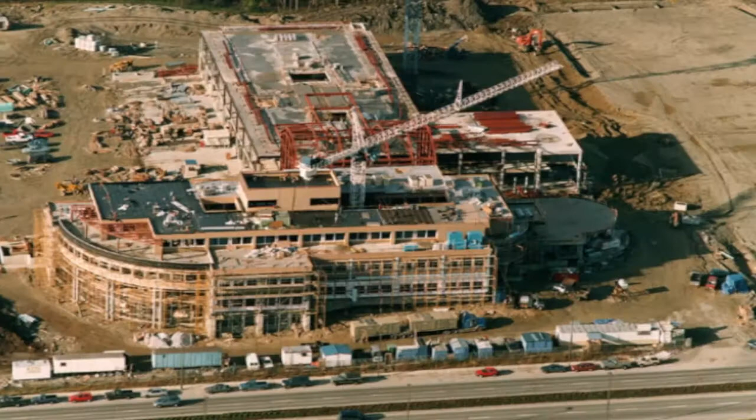DGS Construction has safely and efficiently built many buildings since 1983. The types of buildings DGS has built range from recreation complexes and schools to strip malls, the Justice Institute, and car dealerships.

Sometimes buildings are built from the ground up, and sometimes they are destroyed, then rebuilt.

The hazards on any DGS construction job site are similar to any large construction project. The construction industry has many hazards. However, we expect each person on our job site to plan and minimize injuries and incidents from the hazards.

DGS Construction has a legal obligation to coordinate everyone on our job site to ensure the hazards of one contractor do not affect another contractor. We also have an obligation to ensure WorkSafe BC regulations and the WCB Act are followed by everyone.

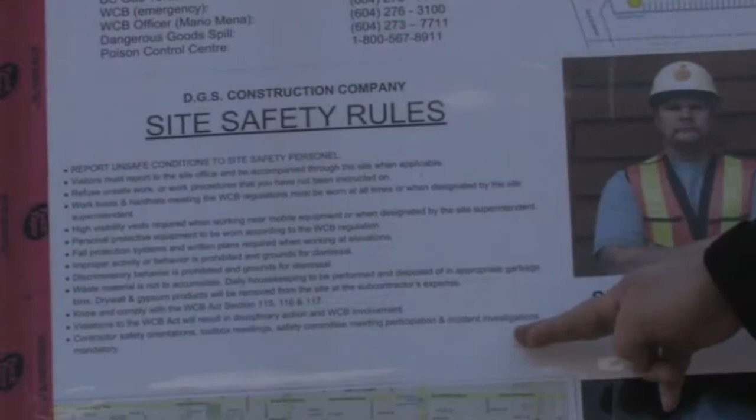Each contractor employer has the ultimate responsibility for developing their own health and safety program and ensuring their workers are following that program. Contractors are also required to follow DGS rules and requirements, despite what an employer has as their own requirements.

WorkSafe BC and the WCB Act and the DGS construction policies and rules must be followed as outlined in the signed contract that was provided at the start of each project. This safety orientation video and guide provided to each contractor will provide everyone with a good understanding of what must be followed when on any DGS construction company job site.

Welcome to a DGS construction job site, and welcome to your construction safety orientation.

In each site office, there are folders containing copies of the DGS Construction Safety Orientation Guide. These are specific to each job site. Each contractor's designated safety coordinator will be given a guide along with the safety orientation sheets.

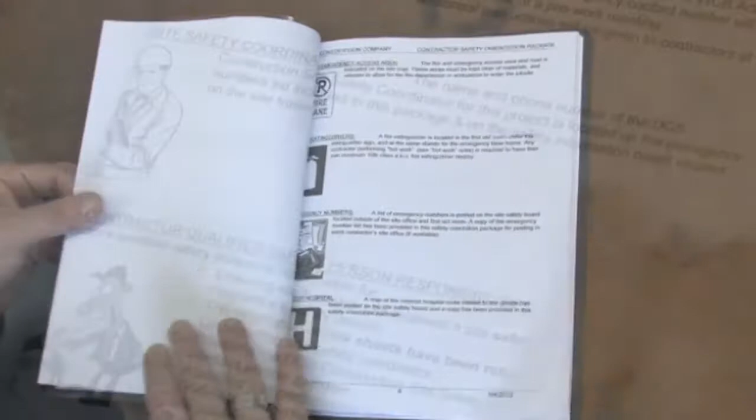The guide is a reference that contains a written copy of all the safety requirements that must be followed as outlined in this video. The orientation sheets are to be completed by each worker on the job site. Check the boxes off on the sheet as they are reviewed with you during the orientation video.

WorkSafe BC regulations require prime contractors to designate a specific person that is responsible for coordinating the activities of contractors on the job site and ensure safety requirements are being followed. DGS Construction designates this responsibility to the site superintendents, as they have the best handle on what is happening on the job site on an hourly basis.

This is the person that you or your company's site safety coordinator should go to if there are any safety issues that need attention.

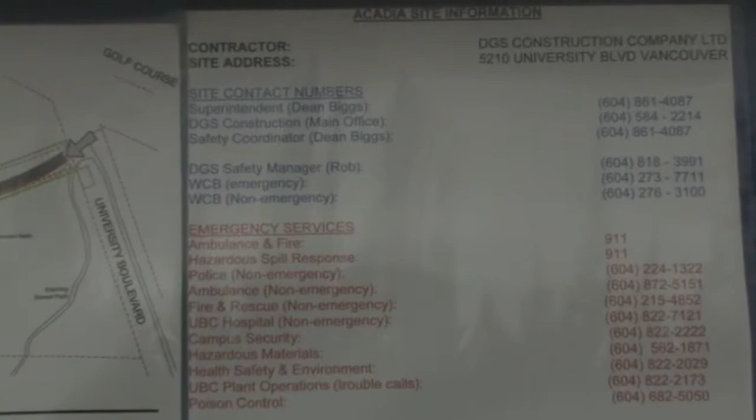The DGS Construction Site Safety Coordinator name and phone number are available from the Emergency Numbers board located on the site trailers and site entrances.

Please enter the DGS Site Safety Coordinator's name on the top left corner of the safety orientation sheet in front of you. Each contractor is required to provide DGS Construction, the prime contractor, with the name and contact information of their site safety coordinator.

The contractor safety coordinator isn't the new guy on the crew. The coordinator has specific responsibilities and will be held accountable for fulfilling these responsibilities.

The contractor safety coordinator is responsible for ensuring each person on their work crew has received a site safety orientation, providing the DGS site safety coordinator with their contact name and number, attending site safety trade meetings, holding toolbox meetings with their crew, reporting unsafe conditions to the DGS site safety coordinator,

informing the DGS site safety coordinator of upcoming work and their associated hazards, so they can be coordinated and planned.

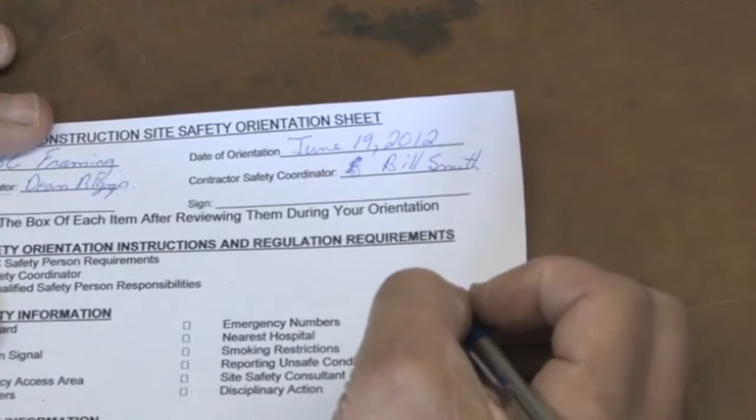The name of each contractor coordinator will be obtained at this orientation and posted on the Office Site Safety Board. This will meet the requirements of the WorkSafe BC Regulation 20.3. Please write the name of your safety coordinator on the orientation sheet, top right-hand corner.

This is the site-specific safety information section of this orientation.

Each DGS construction site has a site safety board located on the site office trailer and at the main entrance gate. Not only does the site safety board contain all the site-specific safety information, but it also includes any safety bulletins that each contractor's safety coordinator needs to review with their crews, so check the board frequently.

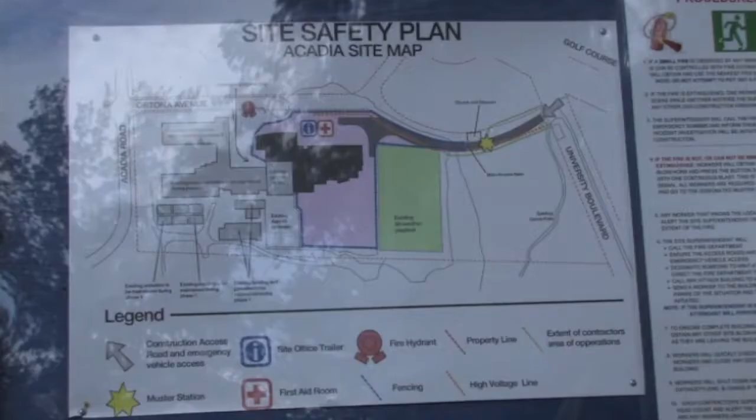On the safety board, you will find a site map which contains any gas and high voltage line locations. It shows where the office, first aid facility, and the location of the muster station, which you must go to if you hear the emergency signal.

Each site muster station location has been chosen and designated based on having a safe place for workers to gather in the event of an emergency. This sign is posted at the muster station. You must meet here if you hear the evacuation signal and wait for your site safety coordinator to do a head count.

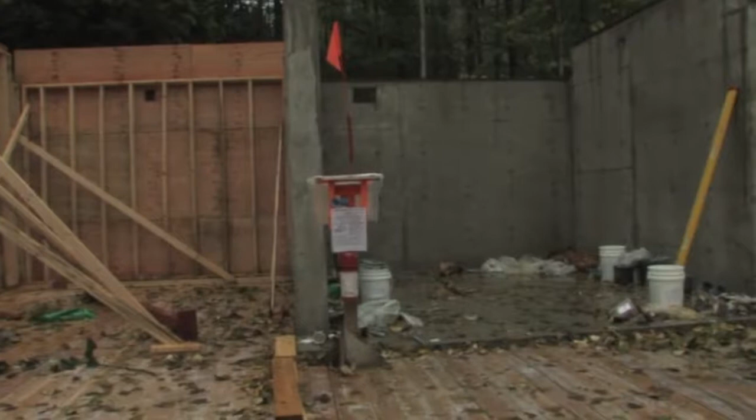In the event of an emergency that requires the site to be evacuated, such as a fire, gas leak, or earthquake, blow the horn by pushing on the top button continuously. Take the horn with you while still sounding it so that other workers will hear the emergency signal.

In the event of emergencies, the fire department or ambulance will need to get into the job site. Ensure you have looked at the map's main access road and that you do not block that area with vehicles or materials at any time.

Fire extinguishers are posted throughout the job site and in the first aid facility trailer. Be aware of where they are.

The Site Safety Board also contains the procedures that must be followed in the event of a fire and outlines when to use the emergency horn to evacuate the job site. These procedures need to be reviewed with all workers during orientations and toolbox meetings. A copy of the procedures has been included in the orientation package.

Contractors that perform work that creates sparks or fire are required to ensure they have fully charged fire extinguishers, and all workers must be familiar with how to pull the pin of an extinguisher and sweep the fire with the extinguishing agent.

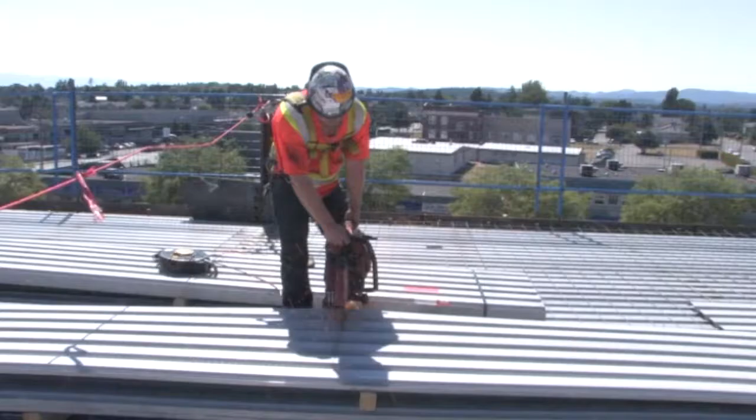DGS has specific fire requirements for contractors that create sparks or use open flames. These requirements include using specific types of flow valve regulators when using compressed gases. Each contractor will be given a copy of the fire prevention requirements.

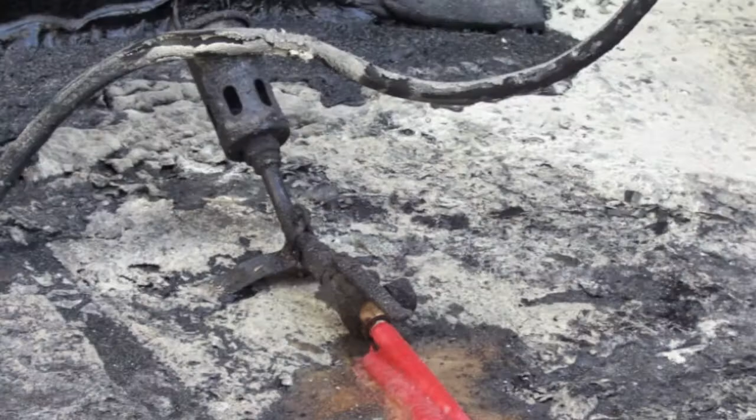Fires have occurred in the past from incorrect torch and regulator use. All regulators used on any DGS construction job site must have an excess flow valve, which engages when the regulator flow button is pressed.

All site safety boards contain the site emergency numbers and the location of the nearest hospital. A copy of the nearest hospital map has been included in the orientation guide that each contractor and safety coordinator has been given.

Smoking is strictly forbidden on any DGS construction job site. Smoking is only permitted outside the gates. There are no exceptions to this rule.

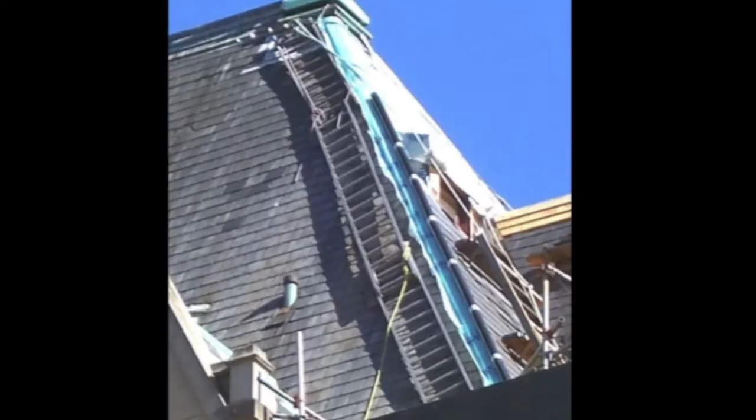Do not create unsafe conditions or put yourself in an unsafe condition. If you see poor guardrails or other unsafe conditions that need attention, bring that information to the DGS Site Safety Coordinator. DGS Construction also has a safety consultant that visits the site and conducts unplanned safety inspections.

Reports are written and many times pictures are taken during the inspections. Copies of inspections are sent to any employer that was not following the requirements of the contract with respect to health and safety. The safety consultant's name is under the emergency numbers list on the site safety board and in the orientation guide.

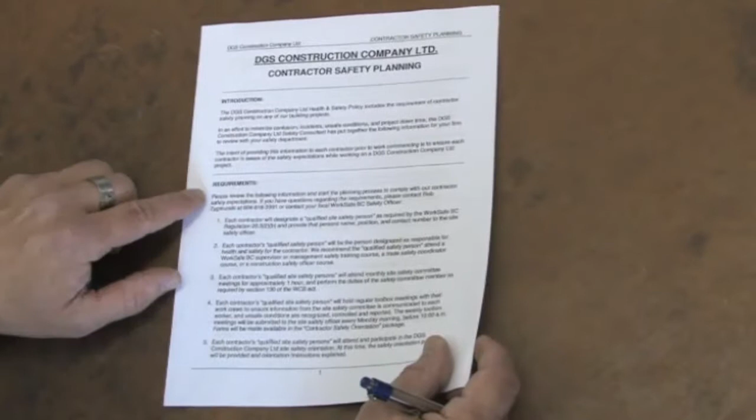As per the written contract, disciplinary action in the form of fines, removal from the site, and WCB involvement are used to ensure all employers follow the DGS construction safety requirements.

This is the first aid and incident information section of this orientation.

During normal working hours, DGS Construction will provide first aid services. The first aid trailer is identified with a sign containing the standard first aid cross symbol.

In the event of an injury, the qualified first aid attendant will provide you with the first aid service they determine is needed until you can see your family doctor. You have the option to accept the first aid services or not.

The site first aid attendant's name, level of first aid qualification, and picture is posted on the site safety board and provided in the orientation guide. You can also report unsafe conditions to this person as they are part of keeping the job site safe for everyone.

If you are not seriously injured and require first aid services, go to the first aid trailer. If the attendant is not in the trailer, you will see the sign regarding using the radios to call for the first aid attendant. Press the call button in the front of the radio to get a hold of the first aid attendant. Use the side button to respond to the attendant to let them know of the situation.

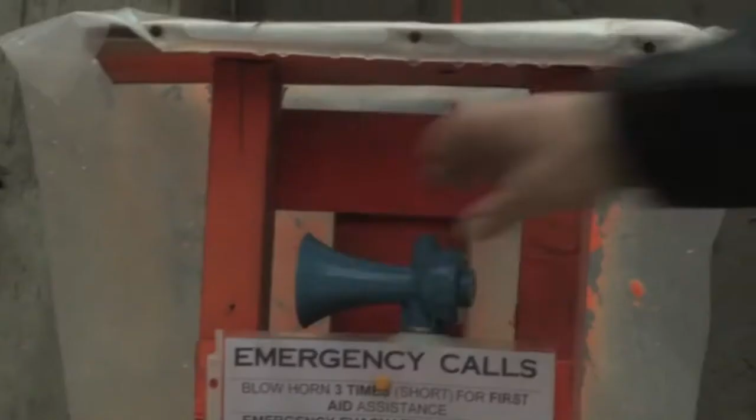If there is a serious injury, the emergency air horn must be blown. The procedure for blowing the horn, 3 short blasts, is posted at the emergency horn station, identified with the bright orange bicycle flag throughout the job site and at the office trailer.

In the event of a first aid emergency, the first aid attendant may ask you to obtain the crash kit and oxygen. These are located in the first aid trailer under the designated signs. If a first aid attendant asks for the kit or oxygen, grab them and bring them to the attendant.

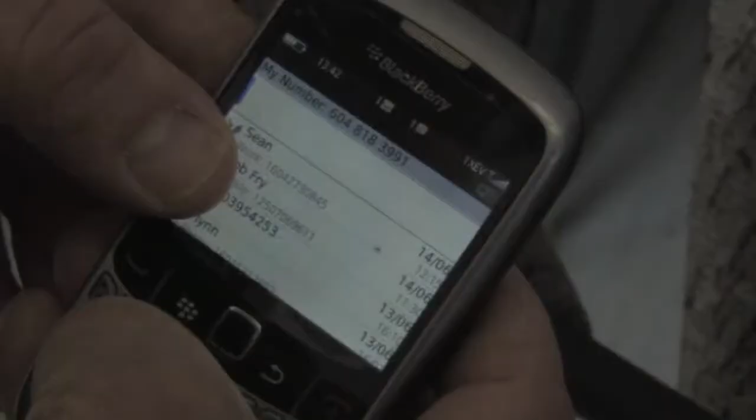If there is a serious injury, or if the first aid attendant asks you to call 911 for an ambulance, use the nearest phone and make sure you give them the correct address, which is located on the emergency horn blast procedures.

To the best of your ability, provide details such as what has happened to the worker and what the extent of the injuries may be. The DGS Site Safety Coordinator or First Aid Attendant will designate you or another person to wait by the site access gate to direct any emergency vehicles into the site and to the incident area.

It is law that WorkSafe BC is called as soon as possible in the event of a serious injury, structural failure, or an incident involving the major release of a hazardous substance. It is the DGS Site Safety Coordinator's discretion when WorkSafe BC must be informed of any incident.

If an incident occurs that requires an investigation, it is unlawful to change the accident scene or remove evidence from the scene. Do not disturb the area of any serious accident. It is the DGS Construction Site Safety Coordinator that determines when the area can be disturbed.

WorkSafe BC requires all accidents that required medical attention to be investigated as per the regulation requirements. This includes all injuries where a worker went to see a doctor.

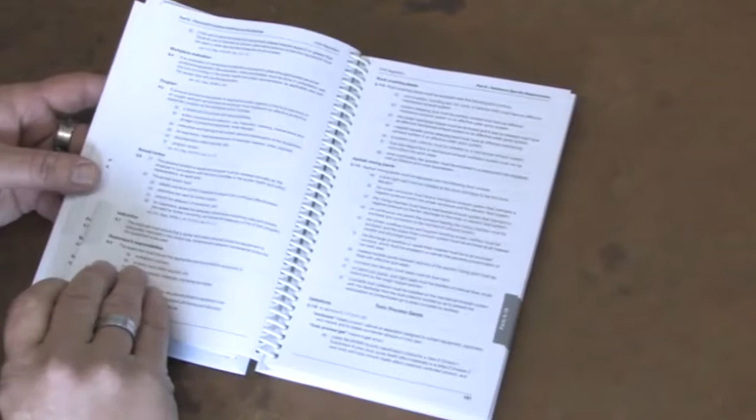Refusal of unsafe work is every worker's right that is enforced by regulations. Workers cannot be punished in any way for reporting unsafe conditions.

I've done it before. I've walked off the site. I'll say, listen, you guys, you can do that. I'm not gonna, and I'm going home. You know what I mean?

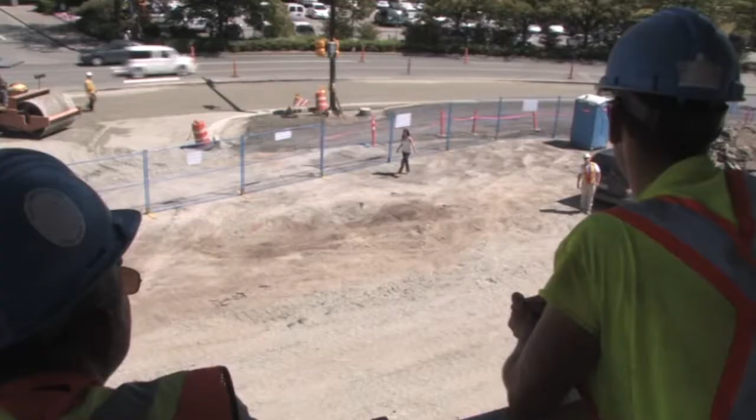Discriminatory or harassing remarks, leering, swearing, unwanted comments, or gestures is prohibited on any DGS construction job site. DGS Construction reserves the right to dismiss anyone from their job site at any time.

Each contractor is responsible for determining when heat stress is an issue, and each employer must ensure fluids are available to workers during hot weather. The site first aid trailer has some water, but that is for emergencies only. Ask the site safety coordinator where potable water can be obtained.

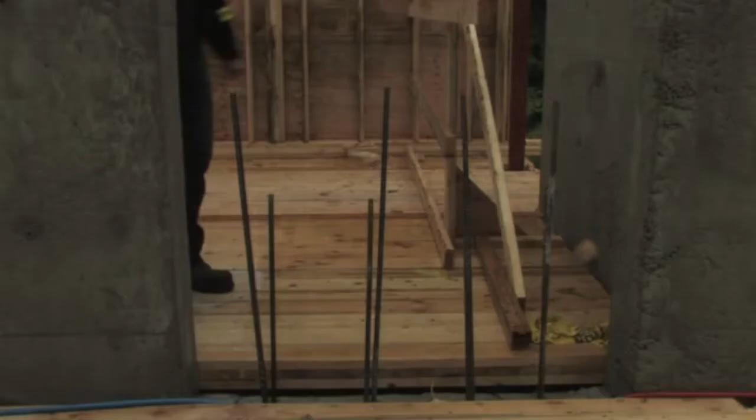Materials that can scrape, puncture, or cut workers, such as rebar, are required to be at least capped with mushroom caps. If workers will be working above an area that contains protruding rebar, the bars must be fitted with lumber. Protrusions, such as conduit coming through a floor slab, must be protected and visually marked by the contractor.

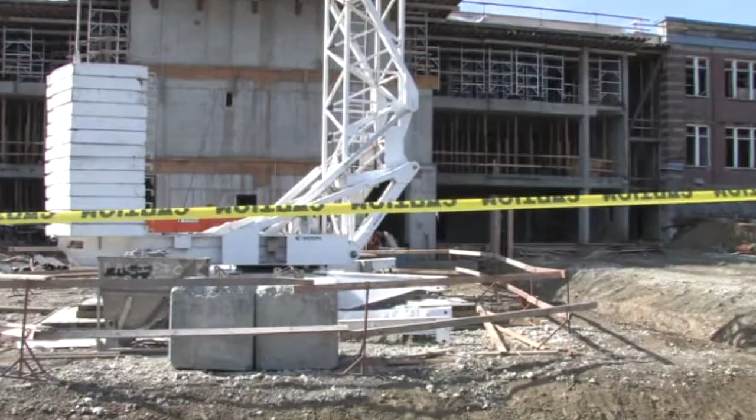Contractors that use cranes or other means to move equipment or materials overhead must ensure no one is below the load. Crane base areas require guarding to prevent workers from entering the swinging turret area. Signs must be posted if working overhead of workers.

Red 'Do Not Enter' tape with signage can be used where workers must not enter due to falling debris or other overhead hazards. On all DGS construction sites, yellow caution tape means you can enter the area after assessing the hazard and checking with workers in the area. Red danger tape means you cannot enter the area at all until the tape is removed. Contractors that use yellow and red tape must remove it when finished and the hazard is eliminated.

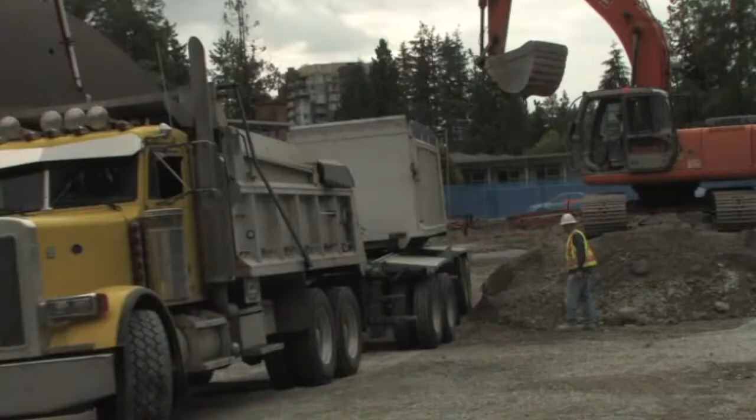Vehicles backing up on site must have alarms and a spotter to help them. Workers that operate heavy equipment must be qualified. Tower crane and mobile crane operators must hold a valid WorkSafe BC operator certification. All-terrain forklift operators must hold a proof of training certificate that meets the CSA standard.

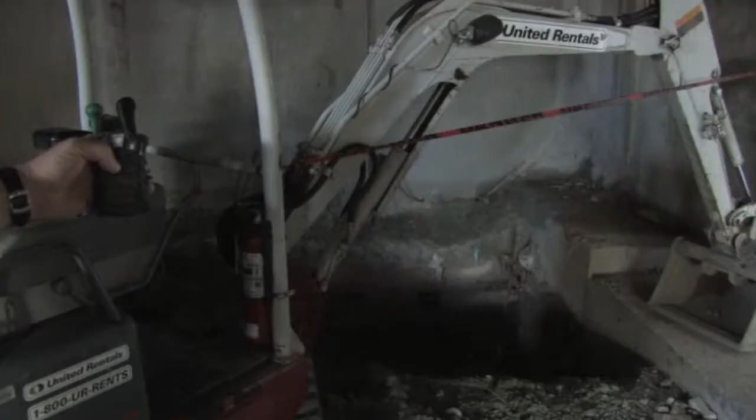If excavators or other internal combustion equipment is used indoors, there must be plenty of clean air ventilation and a gas detector must be used to monitor the air quality. Boom lift operation can only be performed by an operator who has been trained in accordance with the CSA standard for training and holds a certificate proving so.

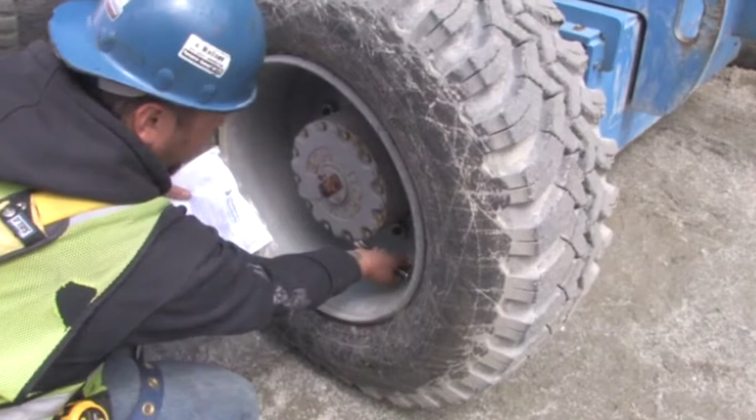All lifts must be inspected for their safe use prior to each shift. The inspection must be documented and kept with the lift. All safety devices must be tested to confirm they are working properly. Prior to using any lift, the work area must be inspected to ensure the lift can be operated safely.

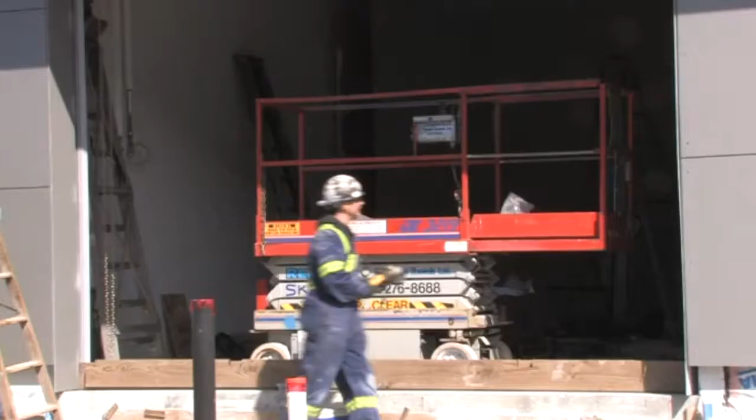Do not add extra decks to lifts to gain more height. Get another lift that'll do the job. Contractors are not permitted to add supporting forks to lifts to hold up glazing or other materials unless the lift manufacturer specifies it's okay and a regulation variance is obtained. Curbs must be installed to prevent lifts from going over edges.

If you need to gain access to an upper roof from a lower roof, don't grab the wall and try hopping up. Also, don't try jumping down from an upper roof to a lower roof - you'll only end up spraining or breaking your ankle. It's not proper access. Neither is using materials that may look like a ladder but aren't built like one - it's actually a pallet.

Don't use other types of skids to try and access the upper roof either. Proper access requires proper planning. You need proper ladders with the proper height to access from one roof level to the next. Correct size ladders must be made available to access decks, floors, and rooftops.

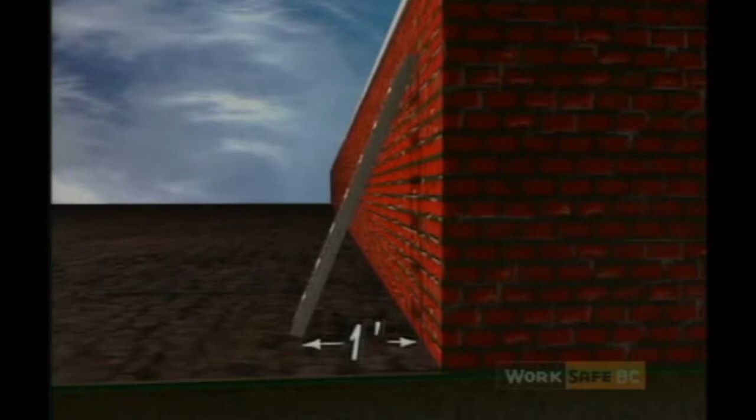Straight or extension ladders must be placed at the proper angle using the 4-to-1 rule. This means the foot of the ladder should extend 1 foot out from the wall for every 4 feet up, and the top of the ladder must extend 3 feet above the structure.

Your extension ladder has to have the right amount of overlap. An extension ladder up to 36 feet needs a 3-foot overlap. A 36 to 48-foot extension ladder needs an overlap of 4 feet. An extension ladder over 48 feet needs a 5-foot overlap. An extension ladder is intended primarily as a means of access, not as a work platform.

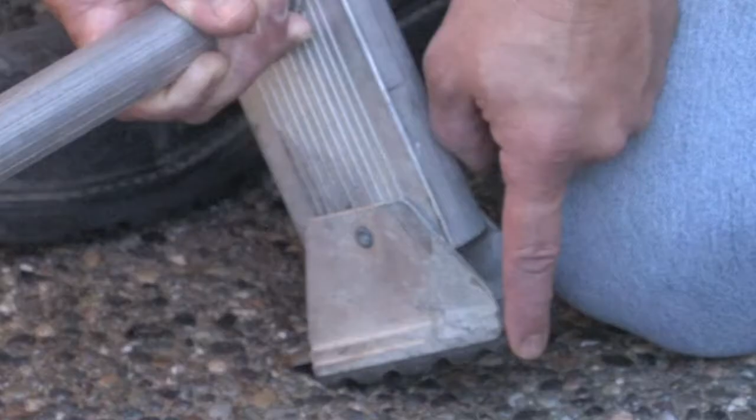Ladders brought to site must have good rubber tread safety adjustable feet. Aluminum ladders without safety feet are not permitted on site. Job-built wooden ladders must be built in accordance with the WCB standard, including the type of lumber required, correct width, and use of filler pieces.

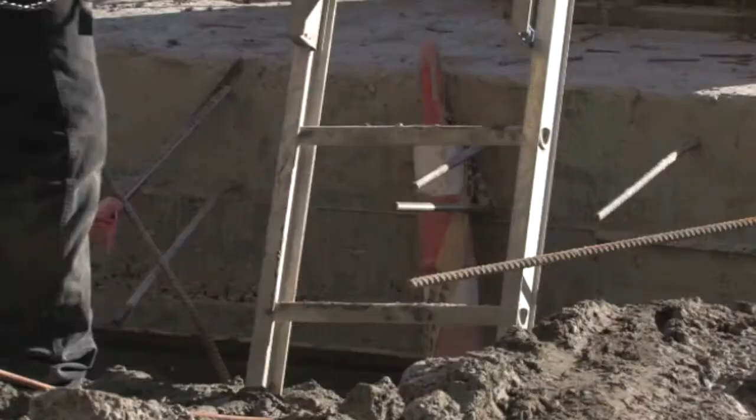All ladders must be secured at least at the top. It is good practice to secure the ladders at the bottom also, to prevent sliding. Position ladders so they won't sway and at the correct slope ratio of 4 vertical to 1 horizontal. If working on ladders above rebar, ensure the rebar is covered with lumber, or there could be serious injury.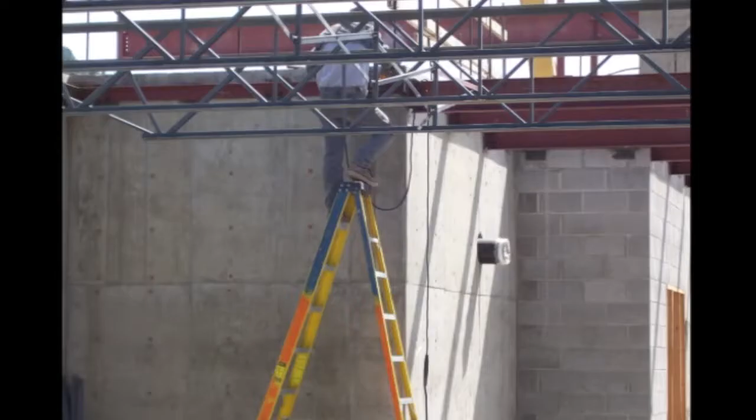DGS construction will provide ladder and stair access. If you notice ladders not secured, fix it or inform the site safety coordinator. Step ladders must be in good condition and used in accordance with the applicable standard. Do not work off the top or second from the top step of a step ladder. Don't overlean beyond the side rails of step ladders, as they can tip.

Power outlet. I'm standing on the ladder, and I'm reaching out. I gave a big push, and the ladder kicked out. The Hole Hawg hit the ground first, its bit aimed upward. And then when I hit the ground, there was this horrible crunch. The bit had gone straight through the socket of Ron's right eye and out the side of his head. Once that drill bit went through, it disintegrated the side.

It exploded. Inspect all ladders prior to use and repair or remove any damaged ones from the site. Prior to using cutting equipment, inspect the blade and guards. Select the right cutting equipment for the job that minimizes harmful dusts.

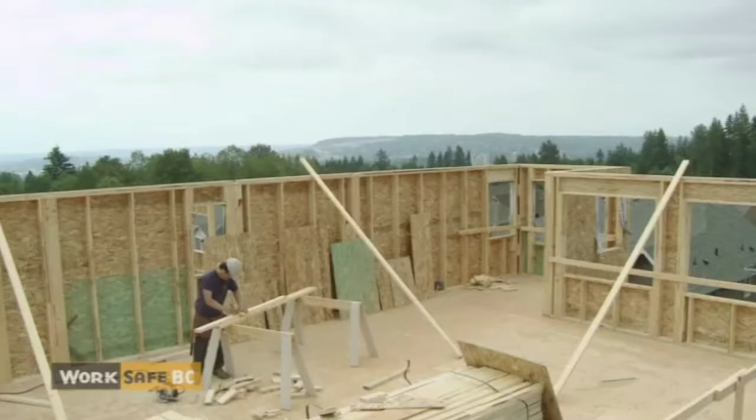Chris, can you bring the broom up?

Residential construction. There's never enough time. Everything has to go just right. And money, you gotta make every penny count. But maybe it's time to think about something else.

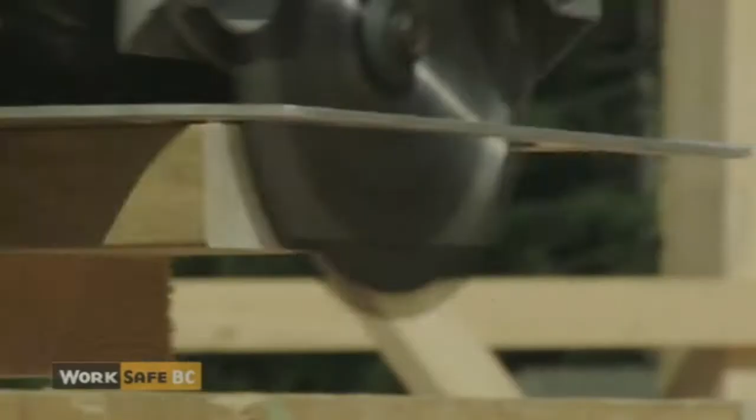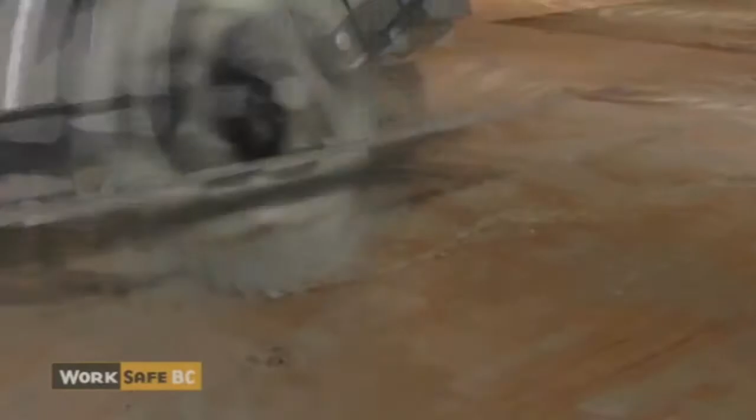Always make sure your guard is working. Don't put down a saw until the guard has fully returned. The saw blade should never be more than about half an inch deeper than the wood you're cutting. You always want to minimize your exposure to the blade. You're a pro. There's always time to do it right.

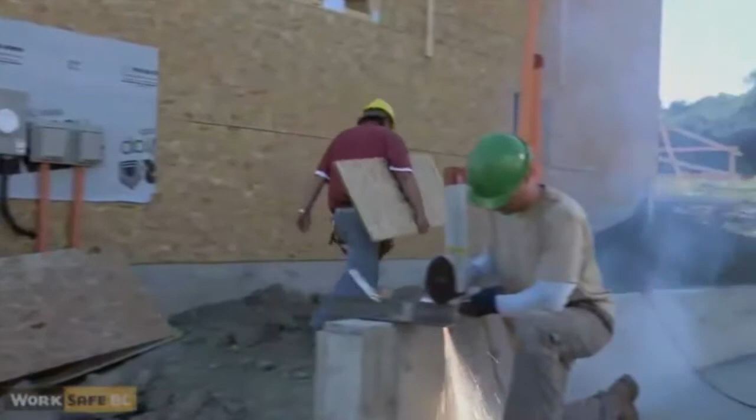Do not operate grinders without the proper guard. Of all the tools used in construction, the handheld grinder is one of the most potentially dangerous.

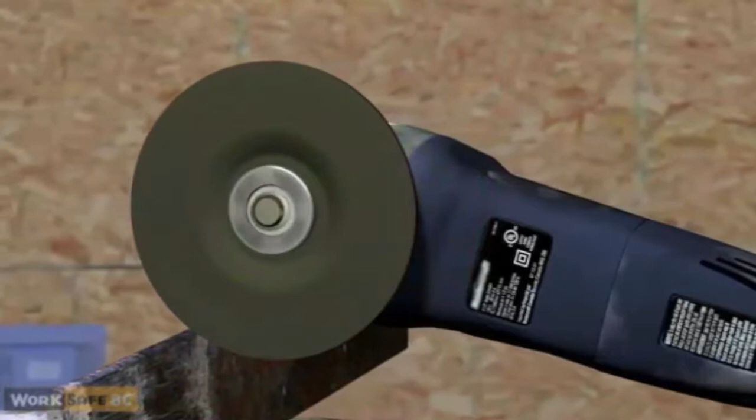Never use a grinder with an abrasive wheel that does not match the maximum diameter and RPM of the grinder. Never use a grinding wheel without a guard. Not only does the guard help protect you from flying debris, but it ensures you don't attach a larger grinding wheel than permitted. An over-rotated wheel can explode, sending shrapnel with enough force to maim or kill.

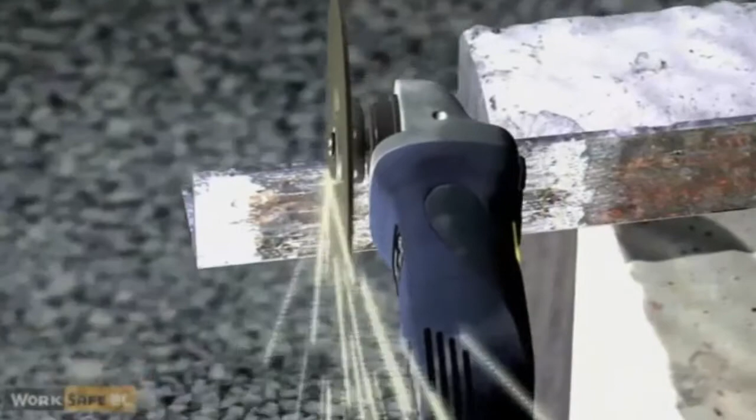Don't use a grinder without a guard. Always match the maximum RPM of the abrasive wheel to the grinder. And wear your personal protective equipment. You're a pro. There's always time to do it right.

Do not store compressed gas cylinders in buildings. Always secure them in their upright position. Storage of flammable fuels must be outside with a fire extinguisher nearby. Contractors that weld or create sparks need to be aware of where their sparks or slag may be flying. Look before you create a fire hazard and store flammables away from cutting areas.

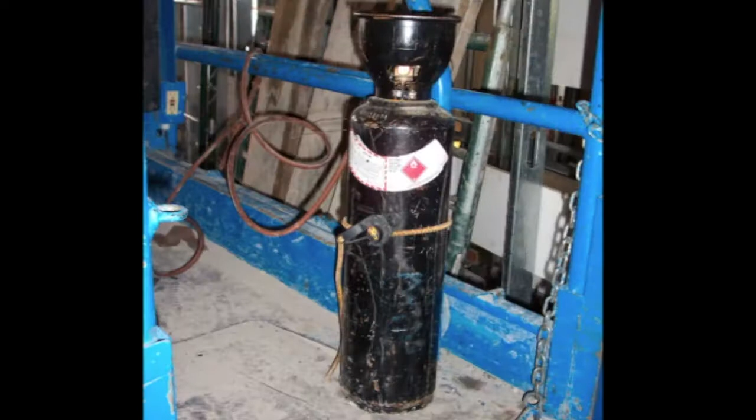Do not lift propane cylinders by their collars or with slings. They must be lifted by approved bins or material boxes. Secure tanks using wire or rope. All tanks require safety collars and securing wherever they are used. Contractors that weld, use torches, or create sparks are required to follow specific fire prevention procedures as posted on the safety board and in the orientation guide.

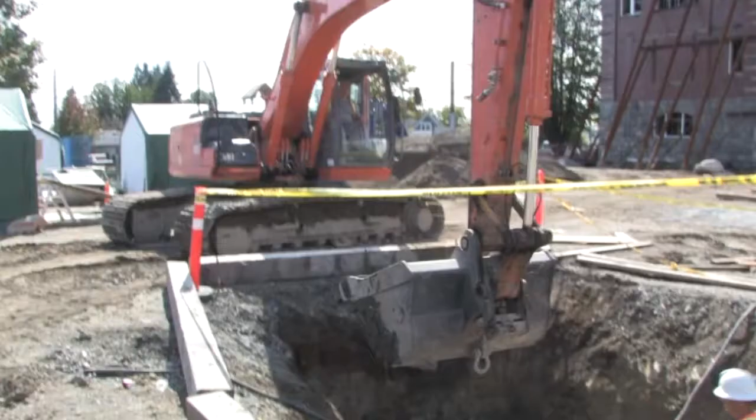Any underground digging requires first determining any power or gas lines. Specific procedures must be followed, including hand digging near these lines. Excavations 4 feet or greater must be sloped properly or verified by an engineer that it is safe to enter the opening.

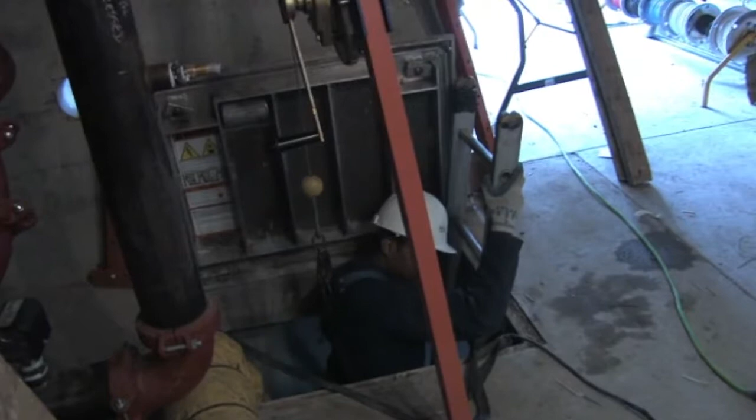Any contractor that needs to enter a confined space must first perform a specific hazard assessment, and an exposure control plan must be developed by a professional. No one is permitted to enter a confined space without permission from the DGS Site Safety Coordinator. Ventilation, rescue, and fall protection must be set up, available, and used.

Prior to entering any confined space, the air must be tested using gas meters. Constant air sampling must be performed while someone is in the space. Everyone must be familiar with the location of high voltage lines, especially crane and lift operators. No equipment is permitted to come closer than 10 feet away from all high voltage lines.

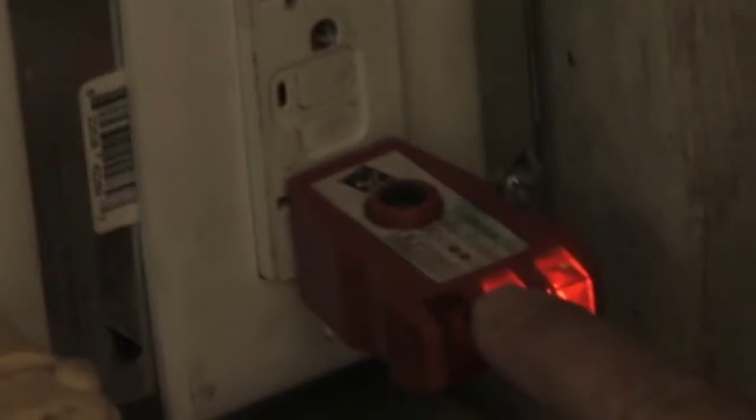All power panel receptacles are fitted with ground fault circuit interrupters, or GFCIs. They will trip the circuit if they detect a fluctuation of 5 milliamps in the circuit. The GFCI will need to be reset by pushing the reset button to get power back. The GFCIs are tested periodically to ensure they trip when they're supposed to.

All power cords need to be connected to a GFCI plug. This includes using power generators. For your safety and those around you, keep power cords out of water and repair cords or welding cables before they shock someone.

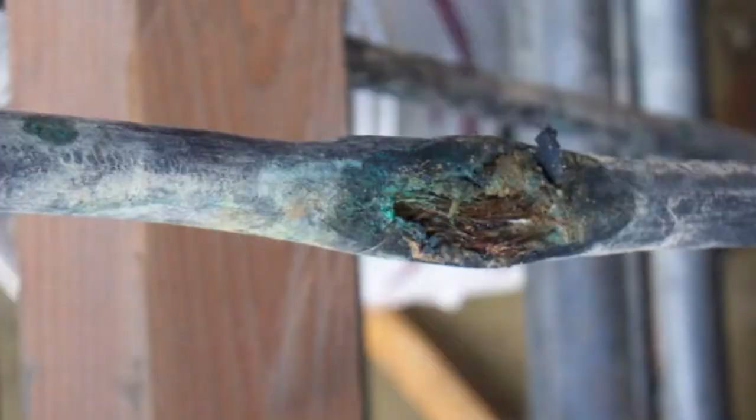Housekeeping must be performed on a regular basis. Tripping over someone else's crap left behind should not occur. Regular housekeeping is mandatory. Contractors that do not clean up after themselves will be back-charged for the time it took to get the cleaning done. Washroom facilities will be provided. However, keep them clean and do not write graffiti on the walls.

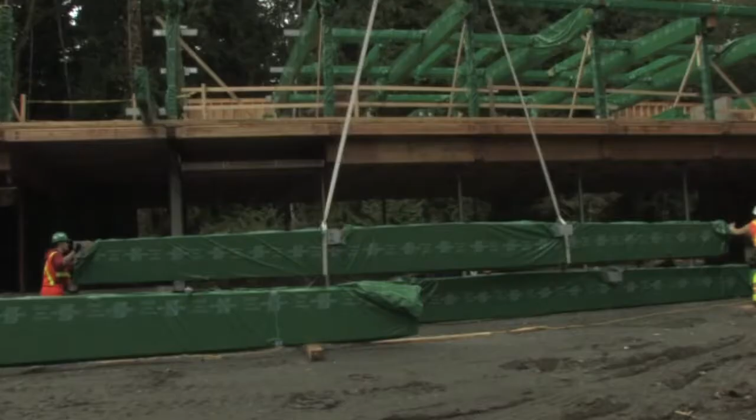Keep the site clean and throw food containers and other food waste into garbage cans. Plan where to store materials and how they will need to be moved. Move materials as soon as possible out of the loading zones.

Store flammables outside of buildings in correct containers. Spill kits must be used if liquid could enter storm drains or streams.

Contractors using harmful chemicals must inform the DGS Site Safety Coordinator prior to use and ensure the workers have all the correct personal protective equipment. Bulk chemical storage in buildings must be okayed by the DGS Site Safety Coordinator.

All controlled products must have supplier labels and the material safety data sheets available on site prior to using them. WHMIS legislation must be followed with all controlled products.

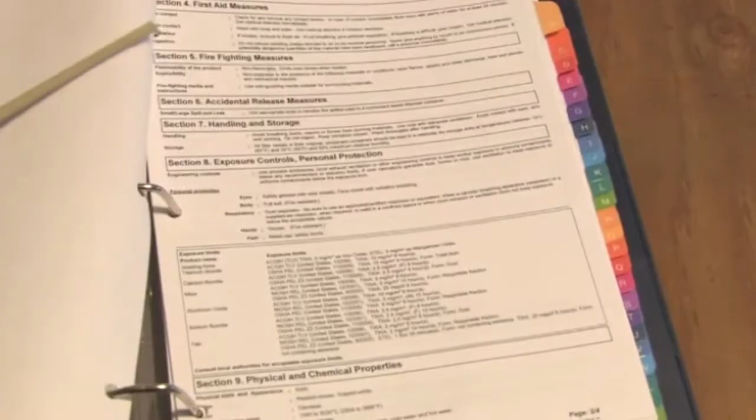This concludes the General Safety Rules section of this orientation. We are now at the Personal Protection Equipment section of this orientation video.

DGS construction has specific requirements for personal protective equipment. Let's start with the clothing requirements. Pants and a t-shirt with a 4-inch sleeve are the minimum requirements. Coveralls are acceptable. Tank tops, no shirt, or shorts are not permitted. You will be sent off site if you cannot comply with this basic requirement.

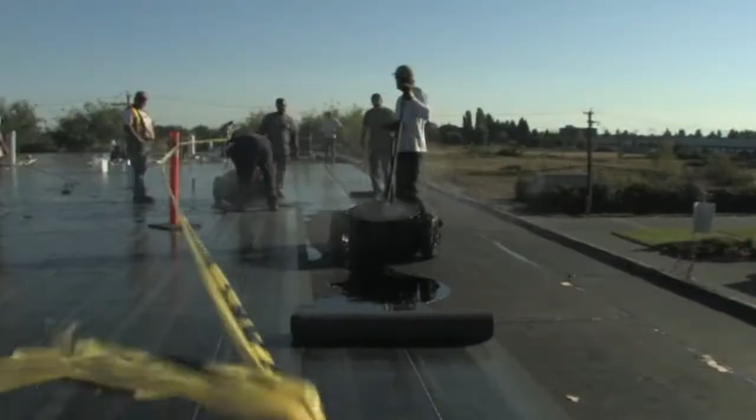Hard hats meeting CSA or ANSI standards are a must. Use do-rags or cooling headbands in hot weather to help with heat stress. Workers that are not exposed to overhead or side impact hazards to the head that want to remove their hard hats due to heat stress must first ask permission from the DGS Site Safety Coordinator. Work breaks must be taken in areas where there are no side or overhead impact hazards to the head.

Inspecting your hard hat should be part of your company's personal protective equipment regular inspection protocol. Look for defects on a regular basis and get a new hard hat when needed.

Footwear must meet CSA or ANSI standards and are required at all times on the job site. They are required to cover the ankle to provide ankle support. If your job tasks require a lower cut shoe with flat soles, this is permitted. However, they must meet CSA or ANSI standards and be worn only in areas where there is no hazard of uneven terrain, floors, or decks.

Look for the green CSA triangle. This means it meets compliance. Footwear that does not provide ankle support or have the toe caps covered are prohibited.

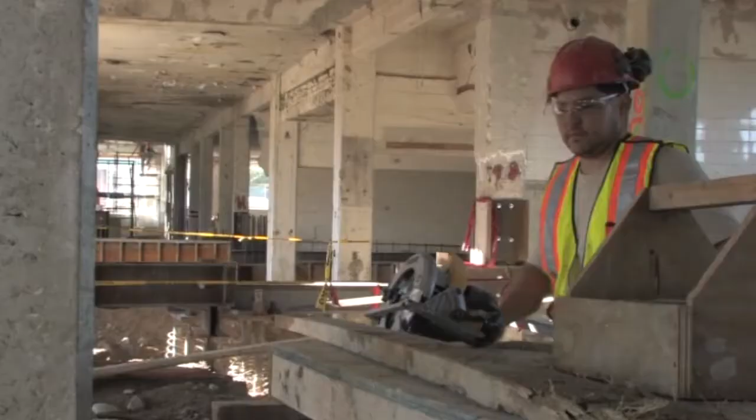DGS construction does not require eye protection to be worn at all times on our job sites. However, eye protection must be worn when needed. Using skill saws, performing overhead work, or any other work where the eyes can be injured requires eye protection.

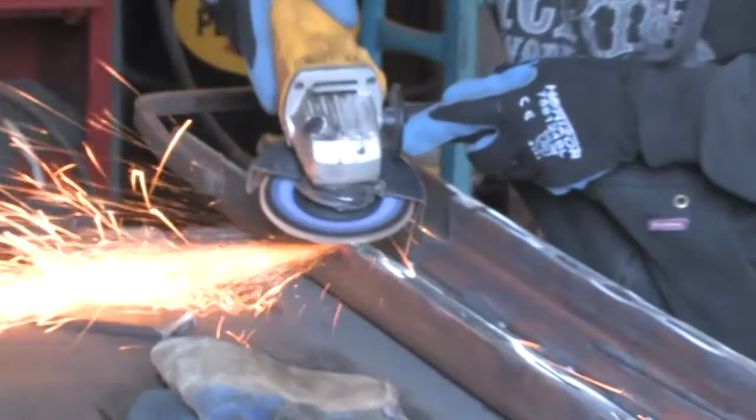Face shields are required anytime a worker uses cut-off saws or portable grinders. This protects both the face and the eyes from the possibility of a shattered disc, wheel, and sparks.

High visibility vests are required to be worn by anyone entering the job site. This helps operators of trucks, lifts, excavators, and other heavy equipment to see you. Make sure you let all equipment operators know where you are and get the okay from them prior to moving near them.

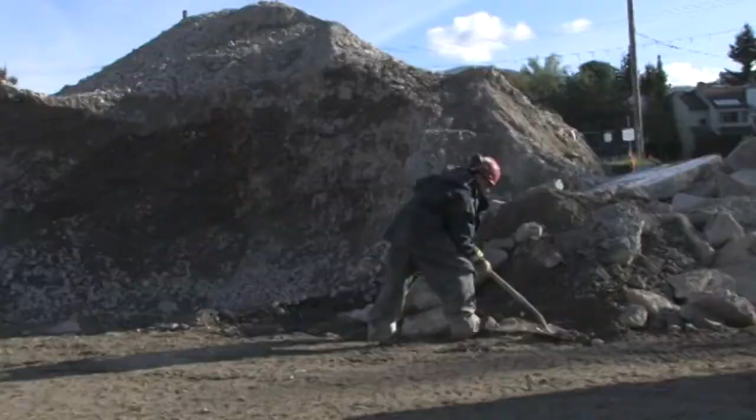If wearing rain gear, make sure your high visibility vest is worn on the outside of your rain gear.

Hearing protection is required to be worn by anyone exposed to noise levels of 85 decibels or greater. 85 decibels is about as loud as a gas-powered lawnmower.

Employers are required to provide ear plugs or other hearing protection to workers. Employers are responsible for training their workers on how to correctly fit and wear hearing protection.

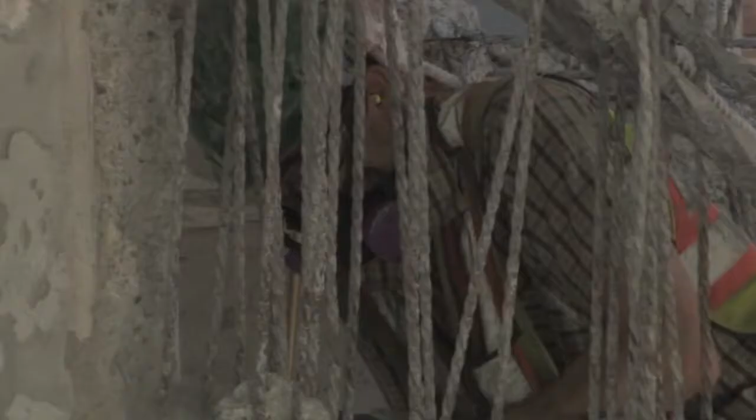Employers that have workers exposed to respirable hazards such as silica in concrete dust or other materials containing hazardous materials are required to have a respiratory protection program. The program must include instructions and training on respirator limitations, how to don a respirator, how to perform fit checks, and how to fit test.

This must be conducted by a qualified person using smoke tubes or banana oil. Contractors must keep records of fit testing and training, as DGS Construction may ask for these records if there is an indication of lack of training.

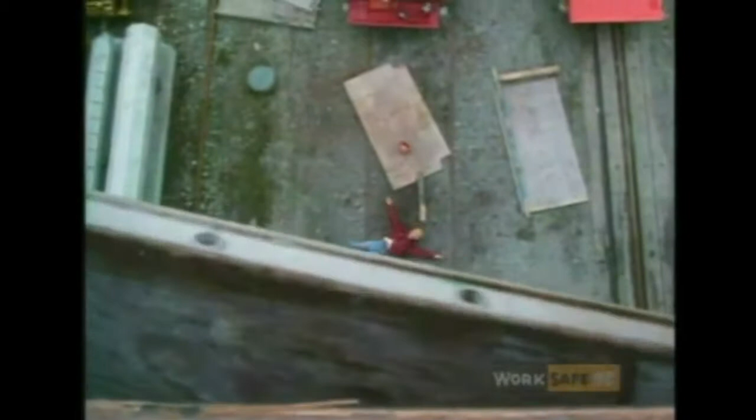We are now at the fall protection section of this orientation video. Working at heights is an inherent part of working in the construction industry. Falls in the construction industry are the number one construction work-related injury. The hazard of falling and injuring yourself is constant. However, with proper training and planning, injuries will be avoided.

This worker fell 30 feet onto pavement while leaning over a roof edge to install some gutter fasteners. The objective of planning and using fall protection systems is to get the task done while not injuring yourself.

Pouring concrete. Get in, do the job, and get out. You gotta move fast, there's no time to screw around. But maybe it's time to start thinking about something else.

I hear that lazy kid of yours is graduating. Yeah, now he wants money for a tux and a limo. Hey Tony, you gonna send that concrete or what? It's coming, just give me a minute. Come on.

You know, I'm pretty proud of him. He's gonna do okay. Scott's been placing concrete for years. He knew what he was doing. He was one of the most experienced guys out there.

Come on, Tony, any day now. It's coming, just give me a minute. Yeah, I'll believe that when I see it.

I don't know, maybe he got his head out of the game for a minute, you know? You gotta be focused when you're doing this. You don't have time to be thinking other things. It's a dangerous job, we all know that. You don't go up there unless you know what's up. He knew what he was doing.

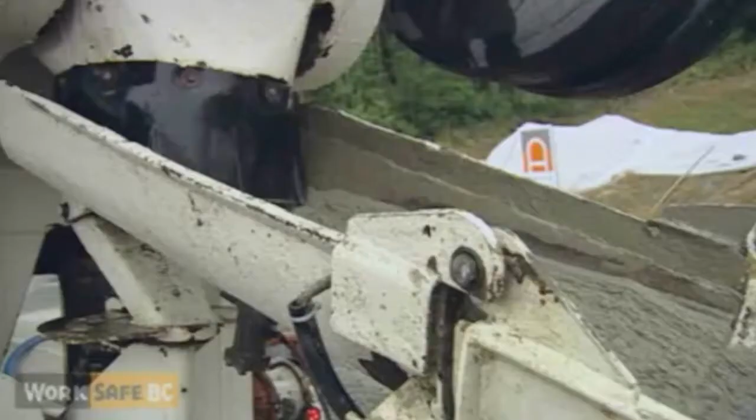Guys, here it comes. Heads up.

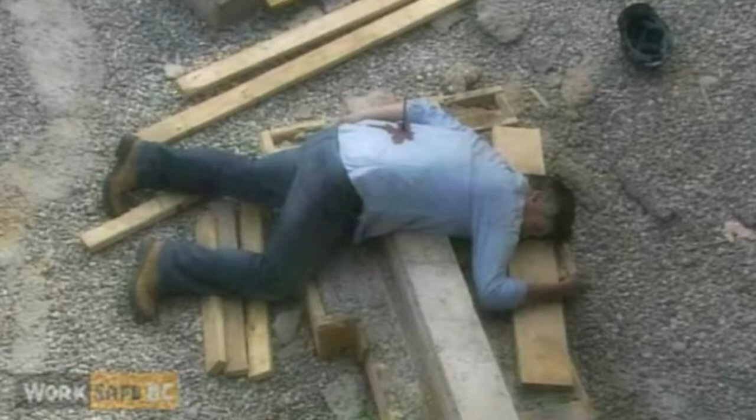One minute he's standing there talking about his kid. The next... I'm going to tell his wife.

Don't walk the walers, build a platform. You're a pro, there's always time to do it right.

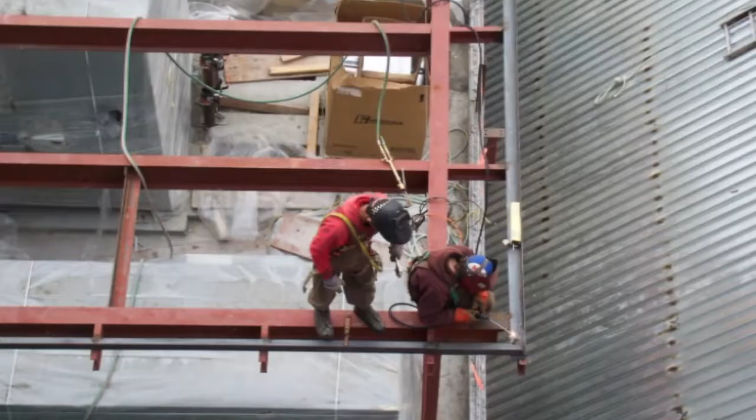Fall protection will be used on all DGS construction job sites, regardless of what trade or experience the workers have. It is not enough to just wear the harness. The anchored systems must be planned and instructions given to workers by their supervisors as to when fall protection is needed and what systems will be used.

To put this into perspective, if you went over the edge and were free falling, gravity will pull you down at an accelerated rate of 9.81 meters per second squared. That translates to 30 kilometers an hour. So in the first second that you fall, you're traveling at approximately 30 kilometers an hour. In the second second, if you continue falling, you're traveling at over 70 kilometers an hour, approximately. And in the third second, if you keep falling, you're traveling at over 100 kilometers an hour.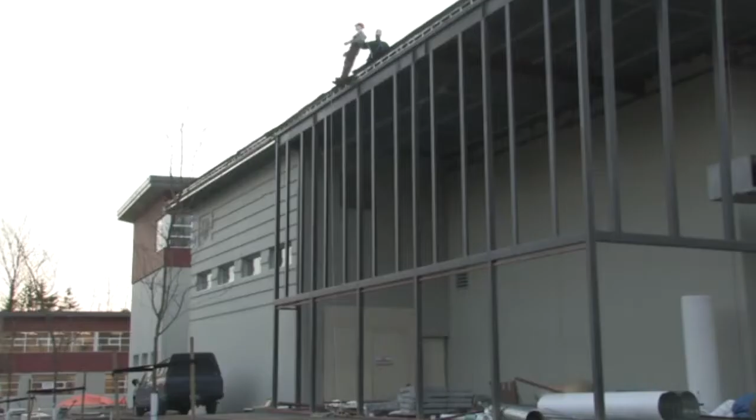Not only that, but in the first second you're going to fall approximately 16 feet, depending on the line and other components. So if you think you're going to have time to grab onto something to stop you from falling, you're sadly mistaken. A body can fall 16 feet in 1 second. That leaves no time to grab something on your way down.

That's why each employer, supervisor, and contractor safety coordinator will discuss the fall protection needs with their workers and plan the systems that will be used. The site safety coordinator needs to be involved in the planning process, as they know where all the guardrails will be installed and where the fall hazards are located. Each contractor's employer is responsible for providing training on all fall protection system requirements, including how to wear and adjust equipment properly, how to connect to anchorage, and how to adjust a personal fall protection system to limit freefall. The requirement for fall protection training is a specific WorkSafeBC requirement.

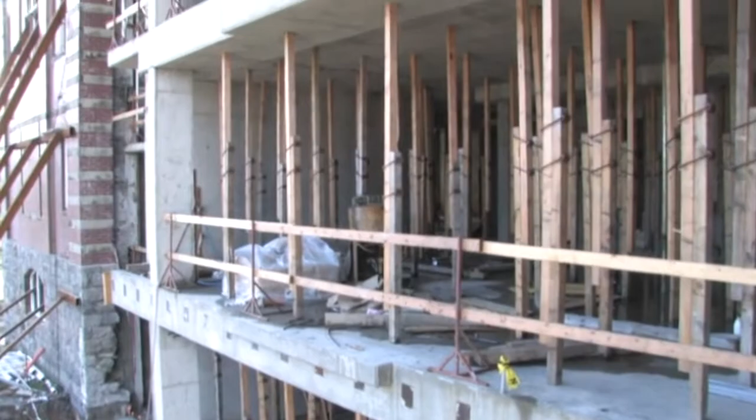DGS Construction will provide perimeter guardrail systems when guardrail systems can be installed. Let's review the guardrail requirements. The first form of fall protection system is a guardrail system. The regulations require that if guardrails can be erected, they will be erected. And if guardrails cannot be erected due to the work process or the edge detail, then you use another form of restraint system, and that would be a personal restraint system. Remember, guardrails are restraint systems - they stop you from going over the edge.

Now, to review the specifications for guardrails, you need to keep in mind the top rail has to be a minimum 40 to 44 inches in height, and it has to be equipped with a mid-rail. Also, a toe board would have to be installed if it's possible that any tools, material, or debris could accidentally be kicked off the edge onto a worker or the public below. This is your first form of fall protection system.

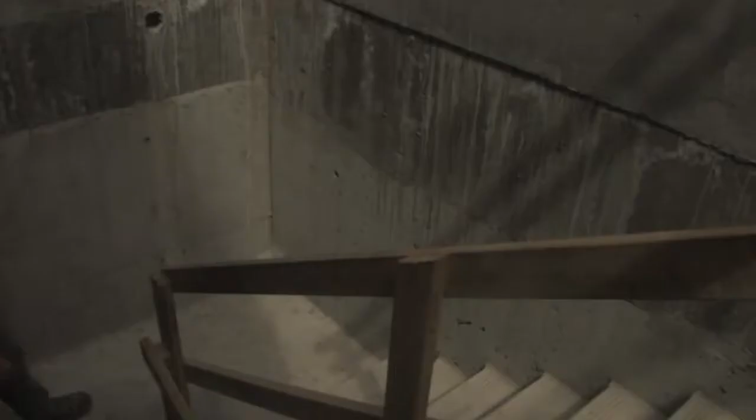The prime contractor has to ensure that handrails are put in place anywhere there's stairs. If you notice any defective or missing handrails, bring it to your supervisor's attention, and he'll bring it to the site safety officer's attention to get it fixed.

If guardrail systems cannot be installed due to the task or detail of the job, personal fall restraint must be considered, where the worker adjusts the rope grab device to limit the distance to the fall hazard area.

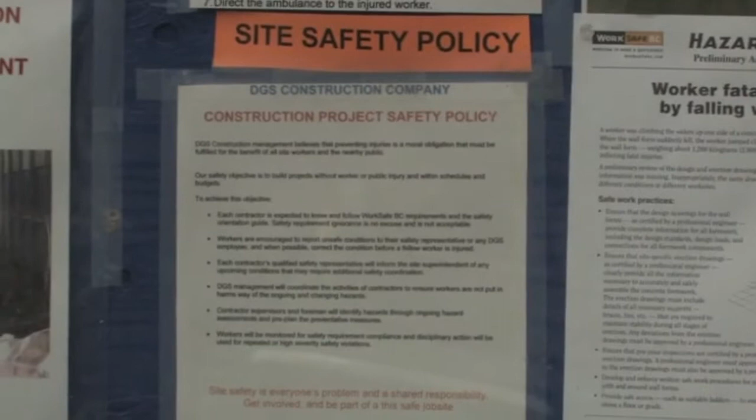Temporary anchor systems may be needed for fastening into concrete or lumber. Planning what fall protection anchorage to use requires each contractor's safety coordinator to discuss fall hazard locations with the DGS Site Safety Coordinator. The Site Trailer Safety Board contains a hanging folder holding all contractor fall protection plans. It is DGS policy that each contractor complete and provide a fall protection plan prior to working in a fall hazard area.

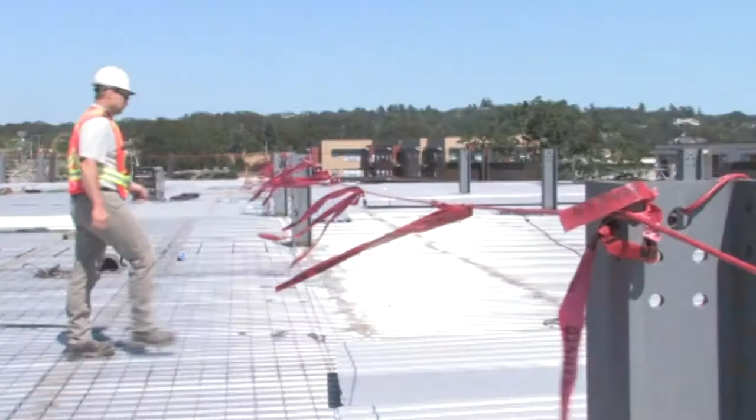A sample fall protection plan has been included in the orientation guide for contractors that do not have their own. A fall hazard is the area 13 feet and closer to an edge that is 10 feet or more above grade. Do not come any closer than 13 feet to a fall hazard area. These areas require fall protection.

DGS Construction will erect warning lines at elevated areas that could not temporarily be guarded. The warning lines will be set back at least 6.5 feet, and if you need to get into that area, you're going to need to use personal fall protection equipment.

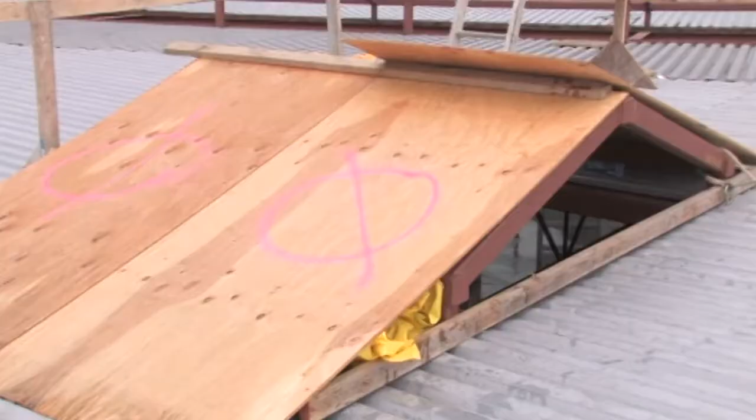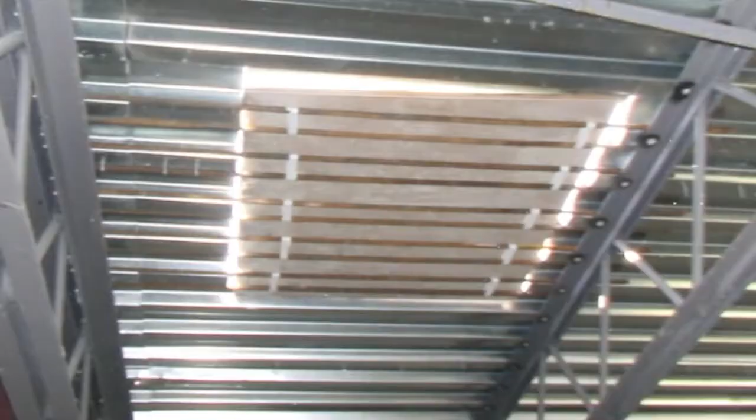You cannot cross this line without some sort of tie-off. DGS Construction will guard or cover openings. The covers must be secured and labeled to identify the hole. Do not make holes in decks or floors or take covers off openings without informing the DGS Site Safety Coordinator. It is DGS Construction policy that rebar and plywood will be used to provide a safe opening cover for all contractors. Other fall protection systems are not required when working near covered openings.

Skylights are not adequate covers, as they can and have been broken when a person falls on them.

Each contractor safety coordinator is responsible for determining what anchorage will be used if their workers require personal fall protection systems. Horizontal lifeline systems may need to be purchased and installed, which involves more planning between all the site safety coordinators. Planning must include using the right equipment and anchoring above the worker to limit the fall distance should a fall occur. When connecting to anchors with rings, use a self-locking carabiner.

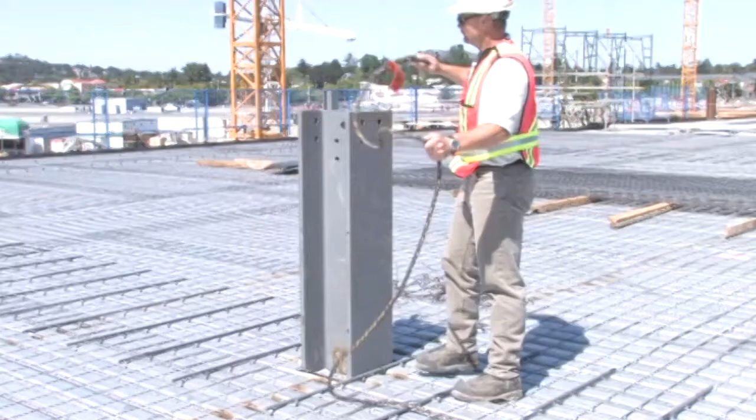If the lifeline does not have a carabiner or snap link, a knot must be tied. The only lifeline knot DGS Construction will accept is a double figure 8 knot. Learn and use the knot as required. If using columns as anchorage, use a tensionless hitch by looping the lifeline around the column 3 times, then snapping the end onto the lifeline.

Now that you know all the fundamentals of a personal fall arrest system, there's one more thing. Well, now that I'm here dangling from my lifeline, it's a good time to talk about rescue procedures.

Regulations require that forethought and some planning take place before using fall arrest systems. You survived the fall. Now how are you going to get down or get back up? You see, you're not out of danger yet. As a matter of fact, workers have died from hanging too long in their harnesses waiting for a rescue. The condition is called orthostatic intolerance, also known as suspension trauma. It happens when suspended in a full body harness for long periods of time, where blood pools in the veins and you lose circulation to the vital organs and to your brain.

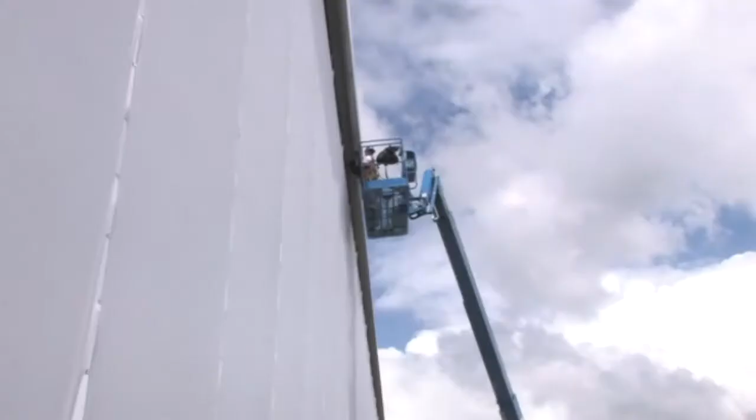Planning to rescue a fallen suspended worker may include the use of lifts, ladders, or the fire department. Either way, you will be waiting for a rescue. Contractors that use personal fall arrest systems should assess if the need for suspended rescue straps should be worn by workers to provide valuable time for rescue. A fall protection rescue plan is required to be included in each contractor's fall protection plan.

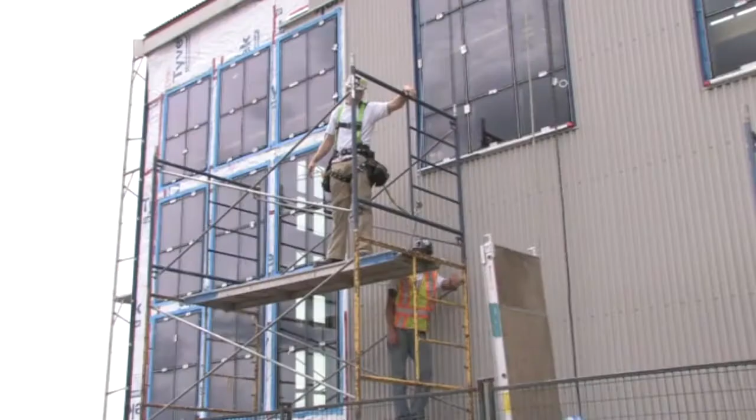Contractors that erect or use scaffolding on a DGS job site are required to use fall protection systems while erecting and dismantling scaffolding that is 10 feet or more above grade. Once again, a documented fall protection plan must be provided to the DGS Site Safety Coordinator for approval prior to any contractor working at heights.

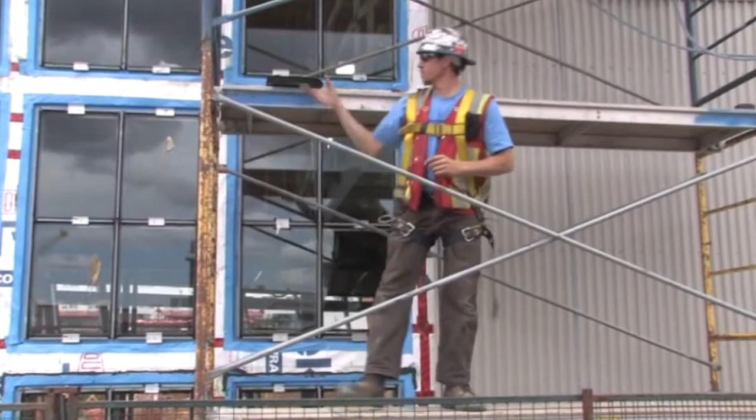Contractors that use scaffolding are responsible for performing daily scaffold safety inspections. If DGS Construction had the scaffolding installed, we will perform the daily scaffold safety inspections. Scaffold inspections will include checking all cross braces and securing pins, ensuring frame couplings are secured with the proper pins. The use of wire is not permitted to secure couplings to scaffold frames. The correct pins must be used.

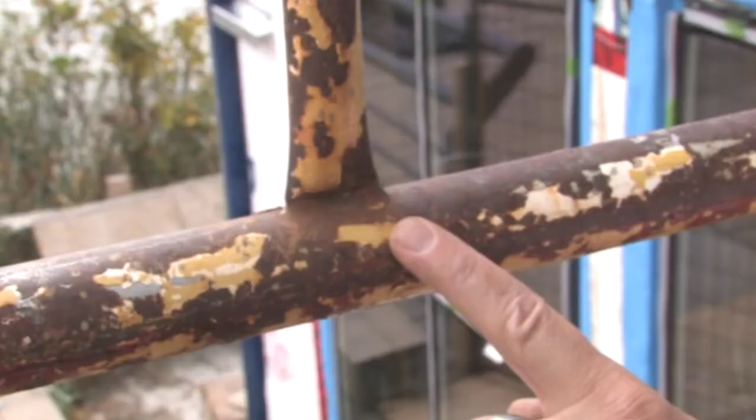Special attention must be given to rusted frames and welds. Platform hooks must also be closely inspected for fractures.

This concludes the DGS Construction Company safety orientation. Know the hazards of your job and your surrounding work area. Construction sites can be a dangerous place, but with your help and cooperation, they don't have to be.